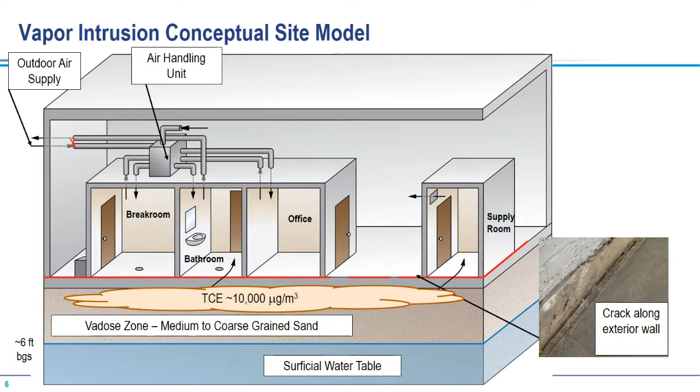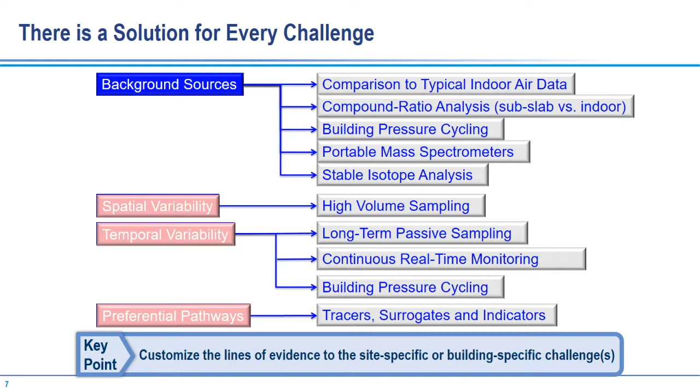We'll not be discussing tools for assessing background contribution, as these methods have been around and in practice for a long time. But for your viewing pleasure, if you need something to read at night, we offer an in-depth review of each of these technologies via, as Gennady mentioned, fact sheets. And one specific fact sheet I would call your attention to is the Navy's VI Matrix of Technologies fact sheet, which can be found publicly on the DENIX website. The link to this site can be found at the end of this presentation, where I show you all the resource material. So let's dive right in.

First stop on this VI train will be continuous real-time monitoring tools. Namely, I'll discuss GC-ECD, or gas chromatography and electron capture detector unit. Try saying that 10 times over. But to avoid that tongue twister, I'm just going to refer to it as the GC-ECD unit.

Generally, you'll find 20 sampling ports on a GC-ECD unit, though some have as many as 50 or more. Being able to rapidly interpret sources can lead to significant cost savings related to site sampling.

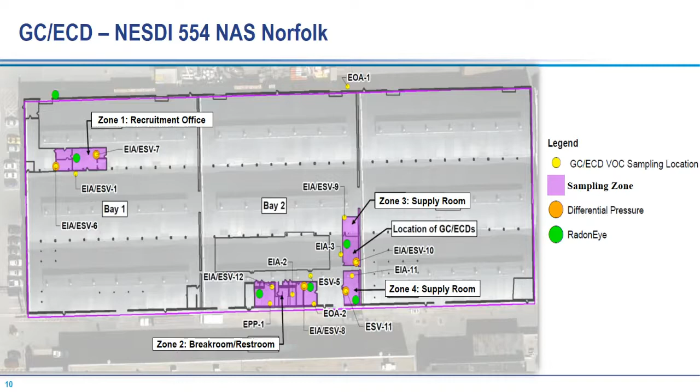And so when we were looking at the break room, we saw some interesting peak rises, the orange and yellow dots, which had sewer utilities intersected with shallow groundwater contaminated with TCE. And the sewer utilities allowed vapors to migrate into the building.

Another interesting point is when we see these spikes in concentration. So from May through September, these concentrations are largely stable and below 1 µg/m3 in that top graph. However, in the winter months, say October through March, we see a lot of peaks above 1 µg/m3 and at times above 10 µg/m3.

And this was due to the stack effect that is observed during the heating or the winter season, where, as we mentioned earlier, when you heat up a building, the air handling system will suck in air, which creates a negative pressure differential or a vacuum, and can pull vapors in from these leaks in the subslab, and in this case, the floor drains.

And when you look at the subsurface, which is the bottom figure, which again has dates on the x-axis and log scale concentrations for TCE on the y-axis, we see very little variability over time. Each of the colors represents a different sampling location, and although the concentrations at each sampling zone differ, the variability at each sampling zone varies relatively little over time. This demonstrates that seasonal variability had little influence on concentrations in the subsurface, but can have significant influences on indoor concentration due to the operation of the HVAC or air handling system.

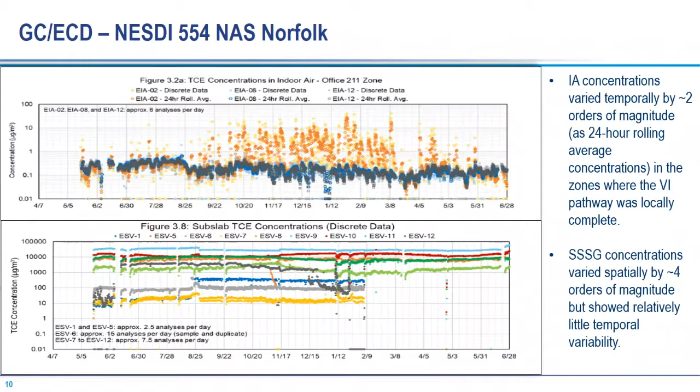So I mentioned tracers and surrogates a few times in the previous slide. This is an appropriate point for us to explain what these mean and how they can help you identify possible vapor intrusion exposure. So it isn't always necessary to measure VOC concentrations directly to figure out whether vapor intrusion is occurring. And sometimes the data is just too complex due to background sources and variability. Background sources may be spray-on degreasers that you may have in indoor air products, or outdoor air with traffic contamination migrating into the building. So tracers, surrogates, and indicators are alternative measurements that can provide information that is not subject to the same biases and can therefore be very useful.

Now for the distinction. So tracers are constituents that can be brought to a site, injected, and assessed. Surrogates are naturally found in the environmental setting, and indicators are, you could say, tertiary properties that can be used to indicate possible presence of a VI phenomenon, such as building pressure and temperature. And I'll provide some greater clarity with some text and examples.

So starting with tracers, which are usually inert compounds that have very similar properties as the compound of interest, say TCE, that we want to assess via VOC migrations. Now, you may say, well, geez, Travis, if you want to assess TCE migration, why don't you just measure TCE? It's like if you're trying to find a masked robber, just look for a guy with a mask. But if you look outside these days, everyone is wearing a mask. So similarly with TCE, along with a whole suite of other VOCs, they can be found in a laundry list of indoor air products and can contribute to ambient background concentrations.

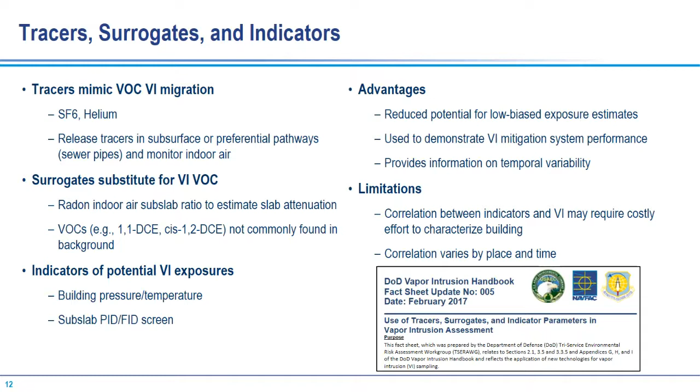This was indicative of a preferential pathway in the subsurface that was facilitating migration of radon and TCE alike through the heating season, which via the air handling unit was pulling in air and creating a negative pressure gradient that facilitated migration of VOCs.

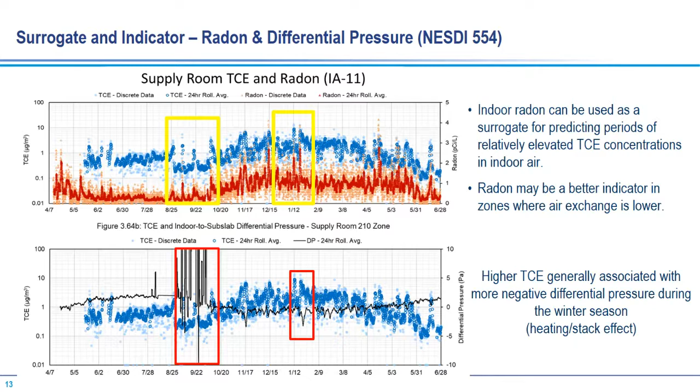So speaking to pressure gradients, we have daily measurements again of TCE, shown in blue, and differential pressure shown with the black line. And looking at the pressure, we see when the building zone was above, say, 0 pascals, which was during the cooling or no operation of the HVAC system, TCE concentrations were below 1 µg/m³. However, during the heating season, in the winter months, when the differential pressure dips below 0 pascals, we observe high TCE concentrations, showing a correlation between TCE and building pressure.

So here we're showing you a tracer example using SF6, and these HVAC or sampling zones displayed in the first column were originally identified by conducting a detailed building survey. So once the HVAC zones had been identified, a detailed inspection was conducted by an HVAC specialist, and as part of the tracer testing using SF6, we were able to get baseline air exchange rates using a decay method.

So shown in the table, I want to explain what these columns are. ACH, that's the air changes per hour. CFM, that's cubic feet per minute. And SF6 is sulfur hexafluoride, which is a non-toxic, non-hazardous, non-flammable gas that is not commonly found in the environment, that acts as an excellent tracer to measure gas movement. So this table shows the calculated air exchange rates for each zone. I've highlighted 2 zones that we'll be discussing in depth.

Now, the several different spaces within zone 2, if you notice, all have pretty similar rates, right around 3 air changes per hour. Also note that the air change rate in zone 4, which is in yellow, the supply room, is over a magnitude lower than the other ones, than say zone 2. And so for the supply room, with the data we observed in the previous figure with radon and differential pressure, this data indicates that radon is more effective in predicting VI in sampling zones where you observe low exchange rates.

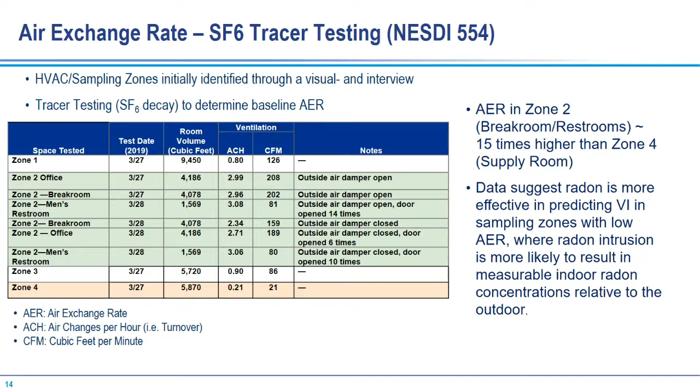Okay, moving right along. Next up is building pressure cycling, which many of you may already be familiar with. So building pressure cycling is a tool at our disposal for essentially turning VI on or off when a preferential pathway is present. Instead of waiting, say, weeks to a month with GC-ECD, with tubes running through various building units and collecting data over a prolonged period of time, you can get an estimate of near worst case exposure within a matter of a few hours.

And as we discussed earlier, building pressure has a significant influence on VI exposure. So if you can bring the building pressure down to the most negative differential pressure that that building would typically experience during normal operation, you can gain immediate insight as to whether you have a possible VI exposure. However, this technology isn't perfect.

The biggest challenge is inducing negative pressure, especially if you're dealing with a massive industrial warehouse where there just may be too much volume for the HVAC system to adequately create consistent negative pressure. Or in older buildings, as we have in the Navy's portfolio, there may be several fractures in the walls, ceilings, and windows that can compromise your ability to induce appreciable pressure changes.

In this instance, you may be able to induce localized pressure reductions in smaller building units within, say, the warehouse, such as a temporary office or a break room or restroom, using blower doors. And these can be brought to a site, fitted to a standard door, and sealed to push air in or pull air out of the room to induce pressure fluctuations and assess VI exposure using real-time instruments such as a HAPSITE,

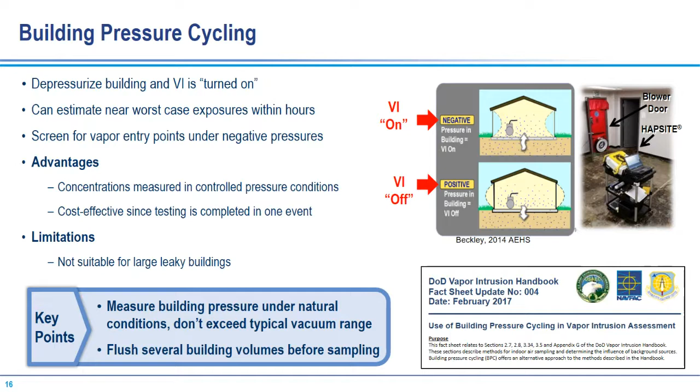But here's a bit more detail on turning on and off VI. You can do this by means of manipulating the HVAC system to change interior pressure, or with the blower door, as I mentioned. For instance, when you're pulling air into an HVAC system, we're depressurizing a building. So that's the figure on the top right, thereby turning VI on.

Conversely, if you push air into a building, you're inducing positive pressure conditions, which suppresses vapor migration into the building. And here you're turning off VI. As I mentioned, you can do this with blower doors in an office or a restroom.

A critical component of this method is to ensure you're operating within the normal pressure ranges, which is typically +5 to -10 pascals. You don't want to be inducing unrealistic pressures on a building such as -50 pascals, because you would be creating artificial conditions that would never exist. And you'd have a hell of a time opening these doors if you did create such a vacuum, because you would possibly crush your fingers with the amount of pressure induced.

So you want to ensure that you're using realistic ranges when turning on VI. You want to create a worst case scenario that is realistic to building pressure conditions that you'd see over the course of operation. And you can determine this by either asking your local HVAC engineer, which is recommended, or doing field testing with, say, a manometer connected to a data logger as you measure pressure fluctuations within the building.

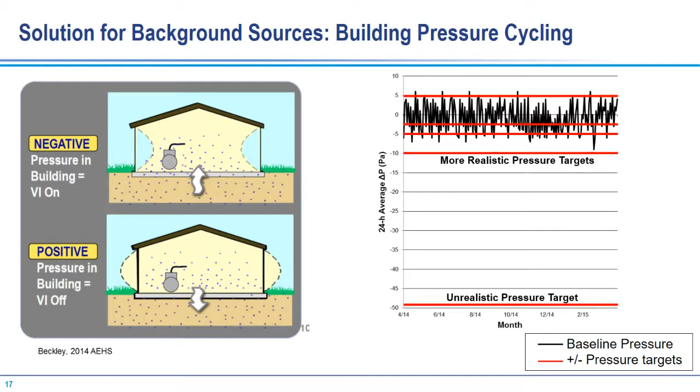So on to an example, back to our NESDI 554 study, where we attempted building pressure cycling. Due to the advanced age of the industrial warehouse, we were unsuccessful in generating consistent negative pressure throughout this large warehouse.

What was observed was there had been an earthquake within, say, the past half century that had damaged the walls, which created a significant leak for air to migrate freely. Along with that, there were several windows within this industrial building that had broken panels. So as we tried to induce pressure, we weren't able to get any sort of consistent pressure. So what we ended up doing was moving forward with using blower doors within the smaller building units.

The data shown here is from the supply room, where you saw the radon data, and the break room. First, the figure on the left is from the supply room for TCE. The X-axis is the differential pressure, starting from -5, -10, -15, and +5 pascals. The Y-axis is average TCE mass discharge that were measured with a HAPSITE.

When pressure got below -5, we observed higher TCE concentrations, which indicated the presence of a VI preferential pathway, because we were able to induce higher concentration with greater negative pressure. If there are no leaks in the foundation, then we wouldn't observe any fluctuations in TCE concentrations under both positive or negative pressure conditions.

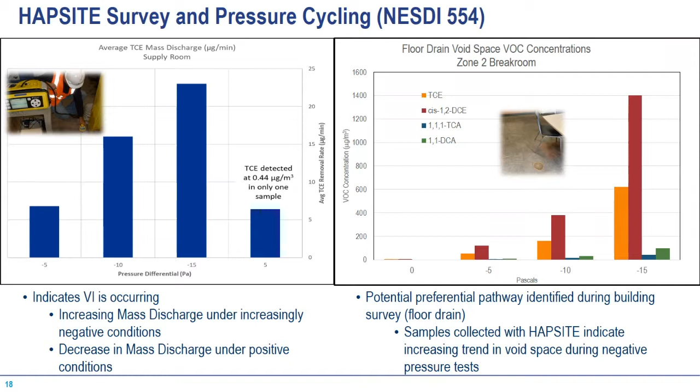Similarly, with the figure on the right, we observe pressure in the x-axis with different colors representing different VOCs. Focusing on cis-1,2-DCE, which, as we previously mentioned, is not commonly found in indoor air products, at more negative pressure we observe greater concentrations, which is indicative of a VI preferential pathway where cis-1,2-DCE is being pulled from the subsurface. In both instances, we were able to apply building pressure cycling to identify a VI preferential pathway in a relatively short period of time, a matter of a couple of hours.

So, getting on to the last bit of our technology train. Last stop is high volume sampling. This tool is really neat, more or less an all-in-one tool, and with a relatively short period of time, you can assess soil gas concentrations, contaminant distribution, and slab leakiness over a pretty massive area.

The general concept follows the cone of depression that you would observe with, let's say, a groundwater well. You'd install a shallow pipe penetration through the subslab and have a vacuum pull air. And through a series of pressure monitoring points, you can assess the capture zone for subsurface vapors. I'll show you several slides to make this point more clear. And we also have fact sheets on the DENIX site as a reference. So some quick pros and cons before I jump into the case study.

For the advantages, the HVS system, high volume sampling, enables fewer sampling locations, helps identify missing hotspot areas, enables soil gas sampling in non-accessible areas, say beneath an active building zone, and enables data for installing a subslab depressurization system. So it supports your data needs, how much volume or flow requirements you may need, and understanding what is the radius of influence for extracting subsurface gas.

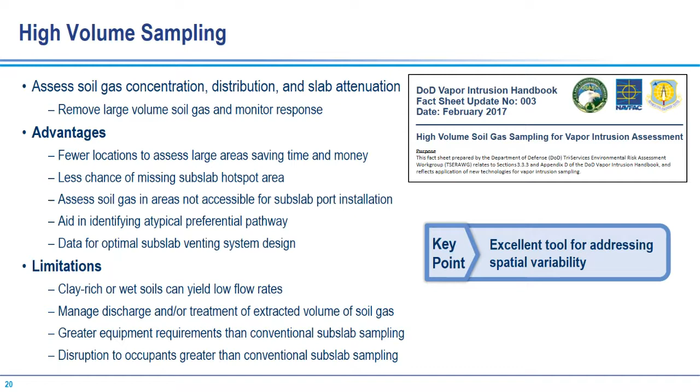Now, some of the limitations: it's not usable in low permeability soils such as clays or wet soils, or sites with shallow groundwater right below the subslab. You just can't generate enough airflow in those low permeability areas. You would need to manage the extracted soil gas, but this can typically be mitigated by just running an exhaust line to the outside. There are more equipment needs than conventional subslab sampling, but it just requires a few more components, and it can be more disruptive than conventional subslab sampling. You'll likely need to conduct this investigation over a weekend. But jumping right along to an example.

Within the DoD, we have some colossal facilities, and one such is this Black Hawk helicopter maintenance facility in Naval Air Station Corpus Christi. It's a massive 20-acre building that rests over a large TCE plume, and it's just not feasible nor economical to Swiss cheese the whole building with pilot holes and 1-liter Summa canisters. You're either going to have way too many samples, a hefty bill, or a high risk of missing important hotspots between a fewer number of sampling zones.

To top it off, this is a Black Hawk helicopter maintenance facility that is highly restricted to access and has sections completely closed off to even the most charming consultants.

So if you go in there, you may not come out. And for those of you that have dreams of stardom, or if you want to make it into a Netflix documentary, you may show up in the mysterious disappearance section.

But personally, that's not how I want to be remembered.

So this presents a unique opportunity to test out high volume sampling. The kit is similar to soil vapor extraction pilot testing, starting with the extraction point, which is a 2 to 3 inch PVC pipe, drilled and inserted and sealed in the foundation that extends below the slab. You have a lung box, which pulls in air to be measured by, say, a HAPSITE to get that real-time analysis, a vacuum gauge to measure pressure and suction, a sampling port connected to a Summa canister to collect samples for lab analysis.

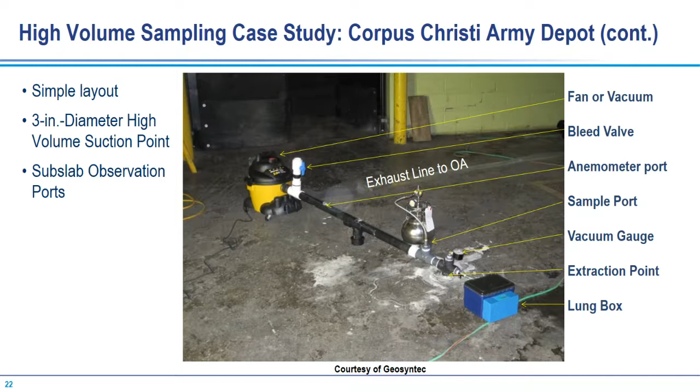So getting back to the example, with HVS, they were able to limit the number of soil vapor mitigation systems, as opposed to having to do a complete remedy for the whole 20-acre footprint. They only had to focus on a 1-acre area that could be effectively addressed with a soil vapor mitigation system, with a significant cost savings in excess of about $5 million.

So what you're seeing here, the green circles were the radius of influence that was observed for each of the HVS locations. In the northern and southern quadrants, they didn't detect much VOCs, hence the larger spacing. And these findings concentrated investigation in the middle, where VOCs were measured. And what you see in that black outline is where VOCs were most notable and was observed an opportunity for mitigation.

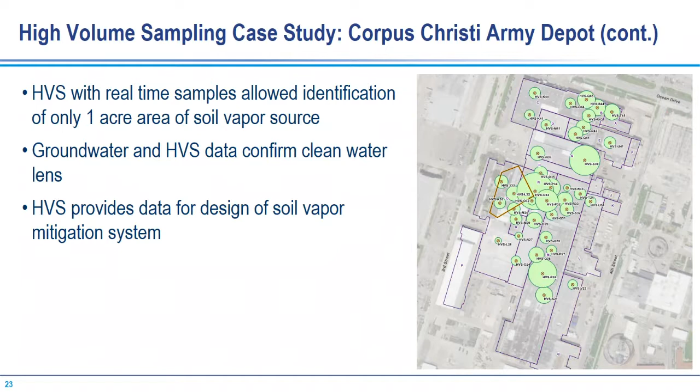So we were able to implement a remedy without being terribly disruptive, as this whole study was conducted over the course of 2 weekends without interfering with normal day-to-day operation during the work week.

All right, we made it. Now we're going to wrap up some of the findings from this lecture. We covered a lot of ground here with tools for temporal variability, preferential pathways, and spatial variability. Within the temporal variability basket, we learned about the continuous real-time monitoring with GC-ECD that are able to collect and analyze air samples from several different building zones, which can inform the user of where VI exposure may exist and of multiple cause and effect relationships.

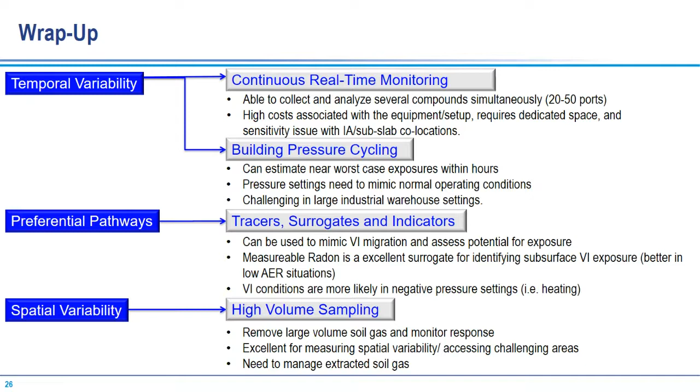Though you need to be cognizant of the subsurface permeability and how you'll manage extracted air, so you don't run into a situation where you're subjecting your field team to TCE being discharged inside. And that's really all I have.